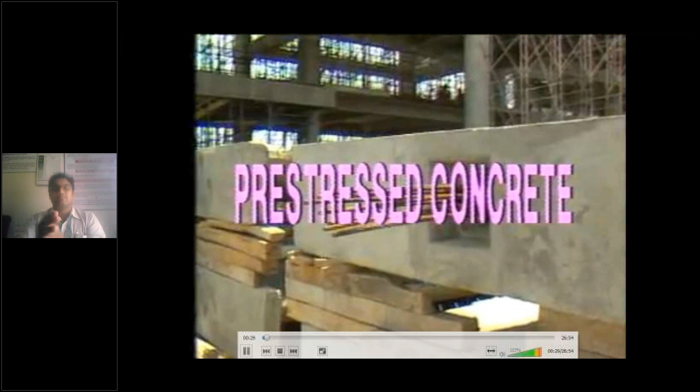Concrete is a very vital man-made construction material used for constructing structures like buildings, bridges, water tanks, etc. It is an intimate mixture of cement, sand, coarse aggregates, and water, suitably designed and proportioned. This plain concrete is very strong in compression, but very weak in tension.

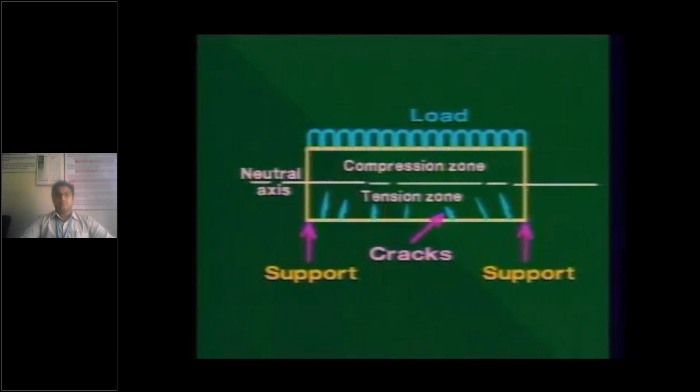Tension induces cracks, leading to structural or functional failure of concrete. So wherever tension comes, steel reinforcements are placed and embedded in concrete. By the bond action, this steel is firmly held by concrete so that tensile stresses are transferred to the steel reinforcement, and the compressive stresses are transferred to the concrete after application of the load.

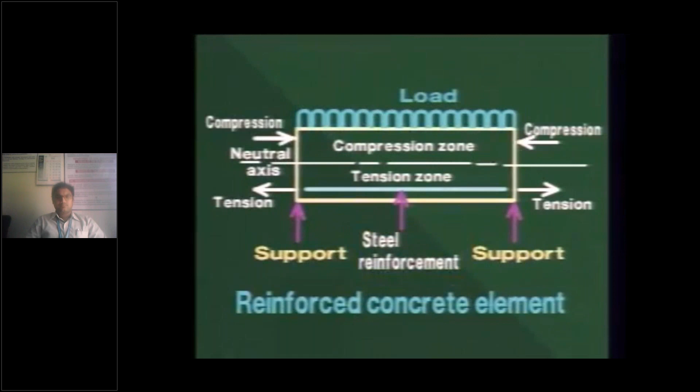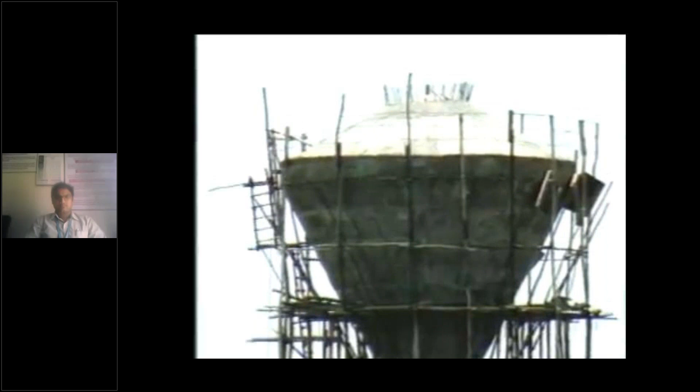This reinforced concrete is uneconomical and functionally ineffective when the span or height of the structural members is very high, when the applied load has more intensity and becomes dynamic, as in bridges, and in places where no cracks are to be developed, like water tanks for functional requirements. In such situations, reinforced concrete is replaced by prestressed concrete.

Let us now consider the example of a cycle spoke. The diameter of the spoke is very small compared to its length. When the axial compressive force is applied on that, it easily buckles. But when it is subjected to heavy loads as part of the cycle wheel, it doesn't buckle.

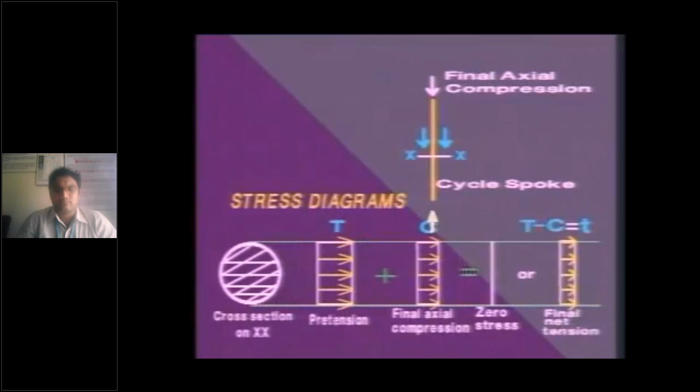This is because it is pre-tensioned. The already induced pre-tension neutralizes this compressive stress after loading, so that the net stress is either zero or tension. As no compression is ultimately developed, buckling is prevented and the wheel shape is maintained.

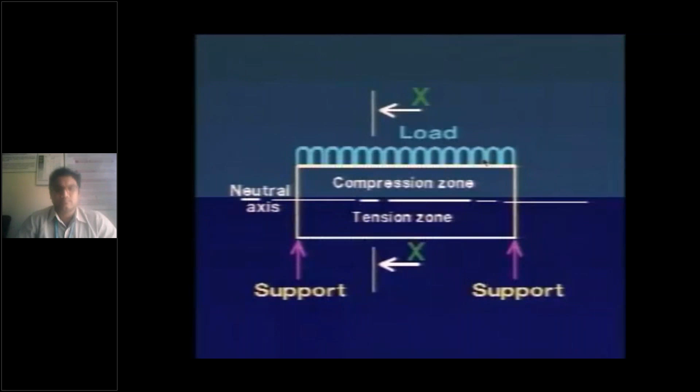This same concept is extended to concrete also. The pre-compression is induced in concrete. When the sections are subjected to tensile stresses due to loading, they are neutralized by the already induced pre-compressive stresses in concrete, so that ultimately the net stress is either zero or compression. Tensile stresses do not occur in concrete at any stage.

Hence, prestressed concrete is a crack-free material, and so it is homogeneous, whereas reinforced concrete is a cracked material, and so it is heterogeneous. In any prestressed work, the steel used is tensioned, which in turn induces the necessary pre-compression to the concrete before the external load is applied. Whereas in RCC, the steel and concrete take the tensile and compressive stresses respectively due to loading.

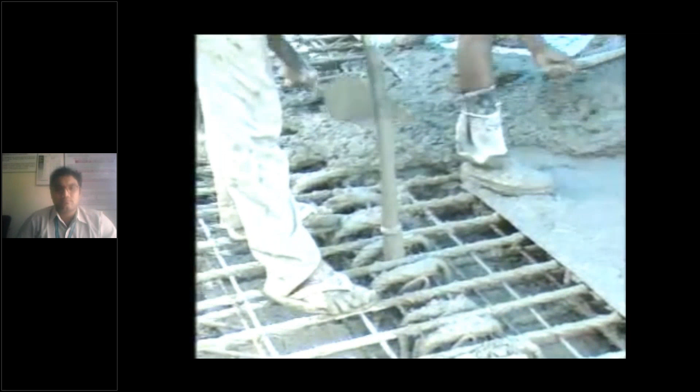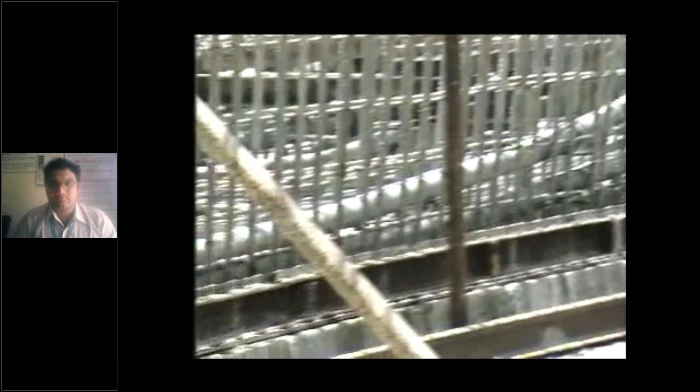This prestressing is classified into many categories. The two main categories are linear prestressing and circular prestressing. In linear prestressing, the steel in straight or parabolic profile is tensioned, which transmits pre-compression to concrete. This is done in linear members like girders, columns, slabs, sleepers, electric poles, etc.

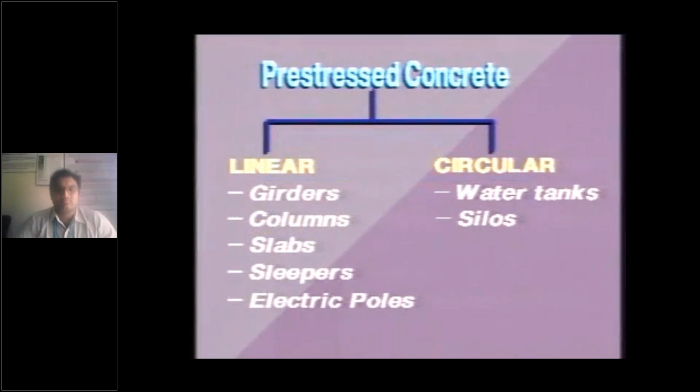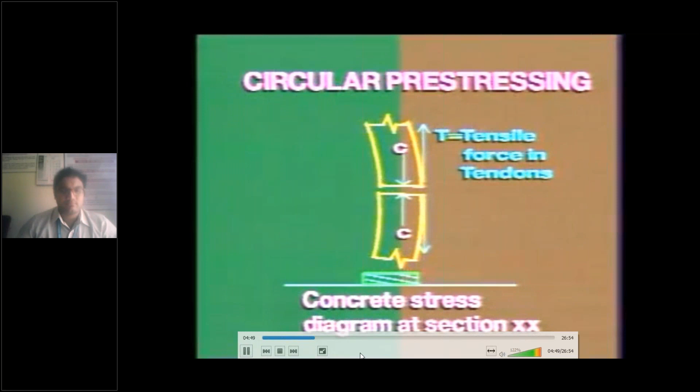In circular prestressing, the process is applied to circular structures like water tanks, silos, and pipes. Here, high tensile steel wires are wound under tension in circles around the structure. The tangential force in the wires creates an equal and opposite compressive stress in the concrete. This compressive stress in concrete is uniformly distributed over the cross-section.

Depending upon the extent of prestressing, the process is again classified into full and partial prestressing. Full prestressing conforms to no tension under working load, which is one end of the spectrum. RCC is at the other end of the spectrum, which is a cracked material. Partial prestressing finds a place in between these two.

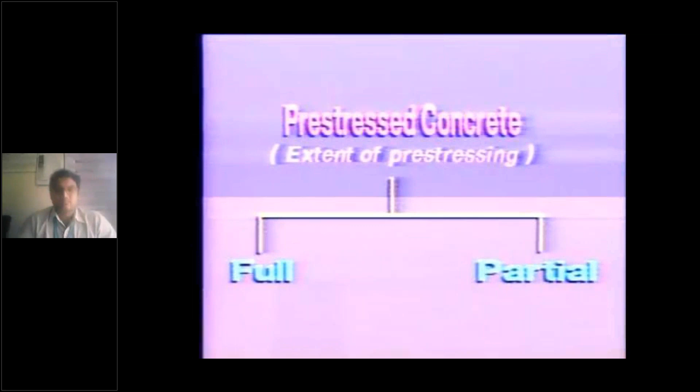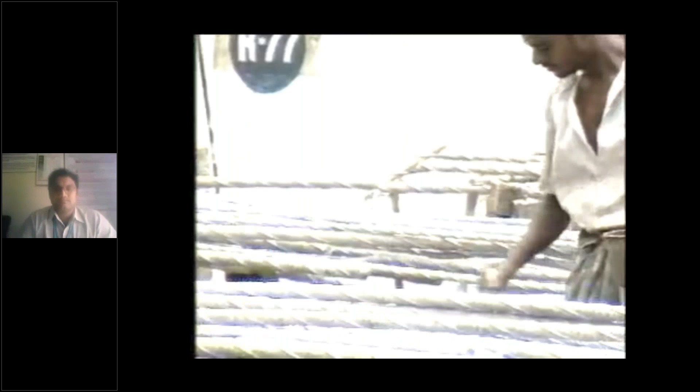Here, the tensile stresses are partially neutralized by prestressing. For the unbalanced tensile stresses, steel reinforcements have to be used. These steel reinforcements are given anti-corrosive treatment coating prior to their placement in position. This partial prestressing prevents an undesirable camber found in full prestressing in the initial stage.

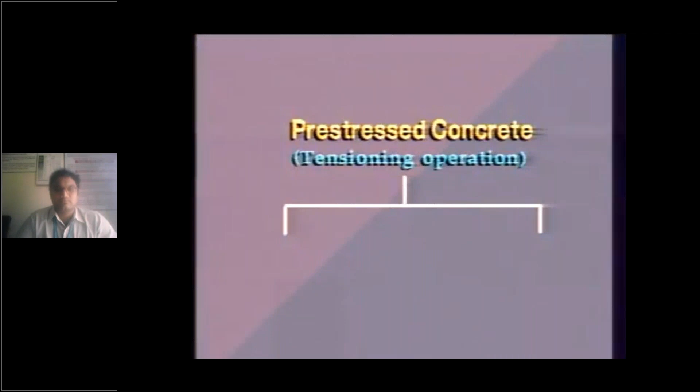Another classification of prestressed concrete, based on the tensioning operation, is pre-tensioning and post-tensioning. In pre-tensioning, the steel is tensioned before the concrete is placed. The anchorage and jacking abutments may be as much as 800 feet apart.

The steel is tensioned over the full length of the casting bed at one time. It is temporarily anchored against some abutments or stressing beds when tensioned. A number of individual members are cast along the stressed steel.

As the fresh concrete hardens, it bonds to the steel, and the concrete has reached the required strength. The jacking force is released. The steel tends to shorten, but is prevented from doing so due to the bond with the concrete. Hence, concrete is pre-compressed.

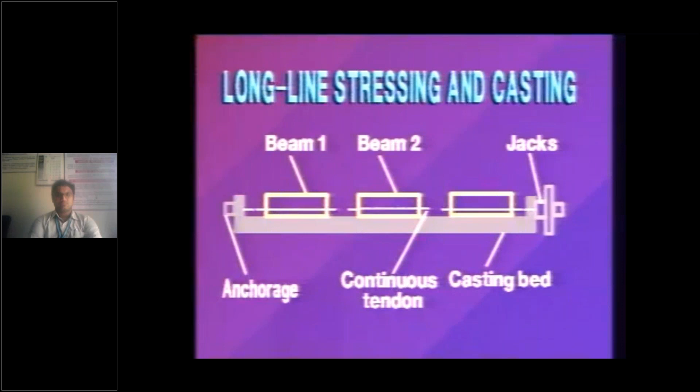Then the steel is cut free between the members. Great saving of labor is affected due to this condition. This long line method is used in precasting.

Guys, this is what we spoke about yesterday, the Hoyer method, right? So the Hoyer method is nothing but the long line method where you can cast multiple elements at a time with a single unit. So this long line method which was just shown in the video, you can try to relate these pictures with this particular video, okay.

Plants or laboratories where permanent beds are provided for such tensioning. It is also used in the field where abutments can be economically constructed. Here, only a straight profile for steel can be used for pre-tensioning.

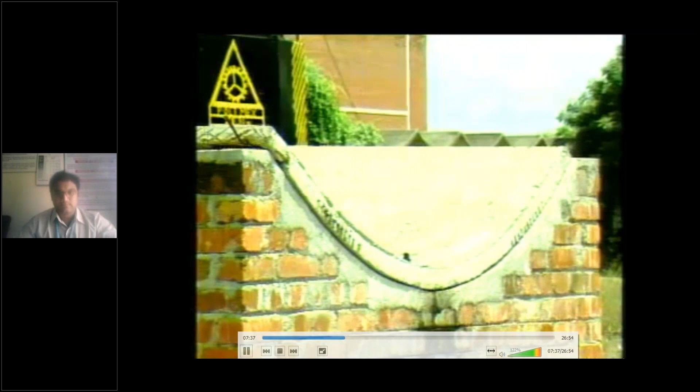Hyperboloid roofing shells, sleepers, etc. can be produced by this method.

Post-tensioning is a method of pre-stressing where the tensioning of steel is done after the concrete has hardened. This process can be applied to members either precast or cast in situ.

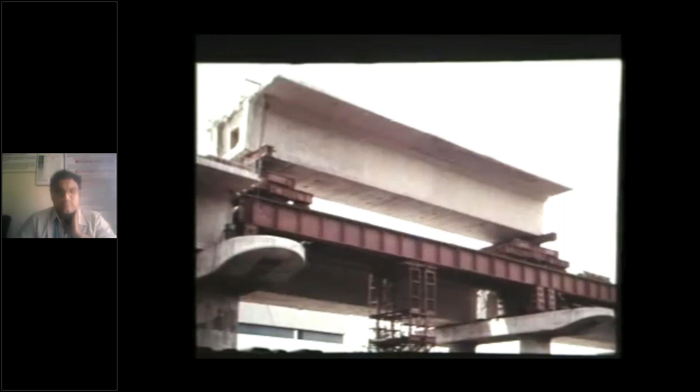Post-tensioning is normally used for massive constructions using big girders. For example, in the case of laying elevated railway tracks, post-tensioned box girders support the tracks and span between the trestle beams.

The trestle beams are supported between massive columns, which in turn are supported by pile foundations. The frames, with trestle beams and columns, bear the box girders.

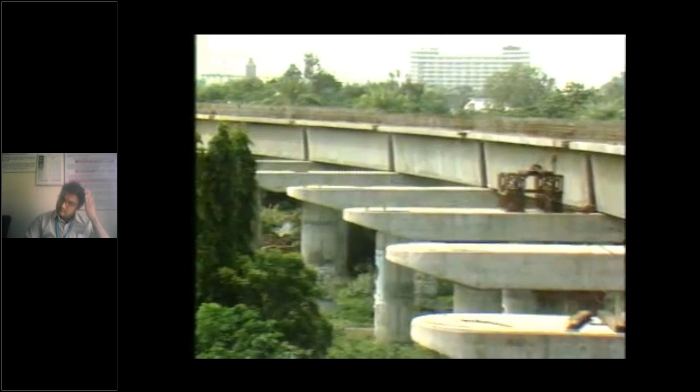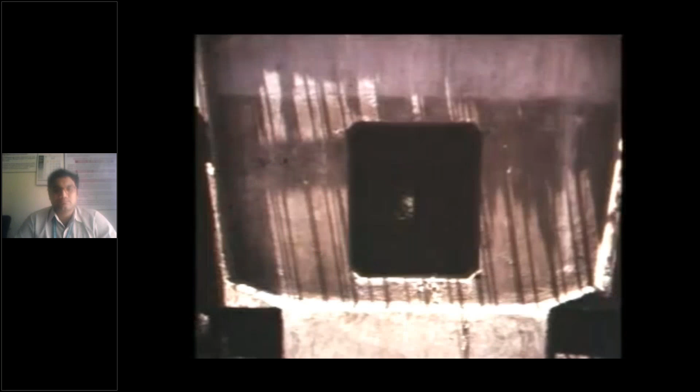Interiors of box girder bridges can be used to accommodate services such as gas pipes, water mains, etc. In larger spans, the bottom flange could be used as another deck to accommodate traffic.

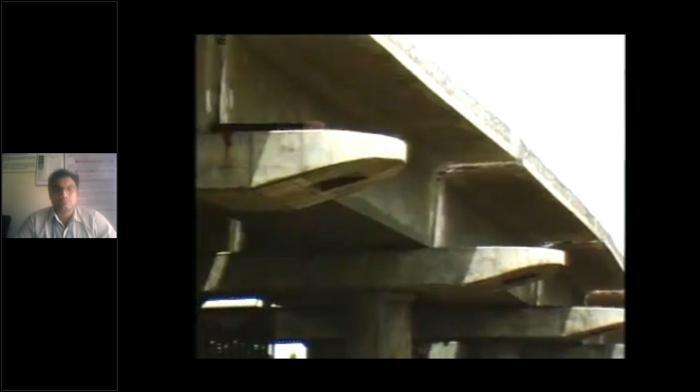The maintenance of box girders is easier as the interior space is directly accessible. So box girders are popular practical sections for bridges and elevated transporting systems.

In the case of massive constructions like a play stadium, the roof can be made from precast, post-tensioned hyperbolic paraboloid shell elements, which are ideal from a structural and architectural point of view.

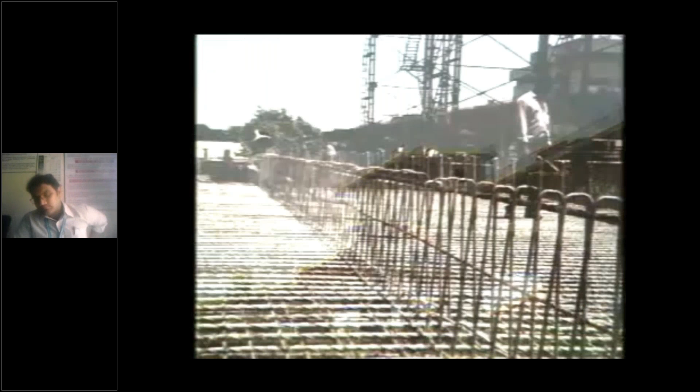In the box girders used for elevated transporting systems, as in railways, the top and bottom slab portions are designed as reinforced concrete slabs. Main reinforcements run parallel to the width, and secondary ones run parallel to the length.

A cantilever span is also provided on one side to accommodate the footpath. The webs are pre-stressed. Vertical shear reinforcements are provided in the webs to take shear force as in RCC.

Normally, the pre-stressing steel is used in the form of strands, where each strand consists of several wires or plies. Strands are made by laying a number of layers of plies in helices over a central core.

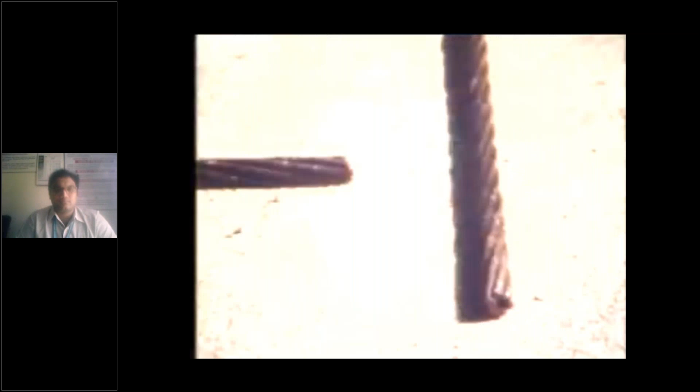A single straight wire forms the core. The remaining wires are laid in helices. The properties of the strand as a whole are to be considered in the design.

For example, in the BBRV system of pre-stressing, normally 7 plies or wires are there in one strand. Here, each ply is about 4 mm in diameter. 12 such strands are there in one cable.

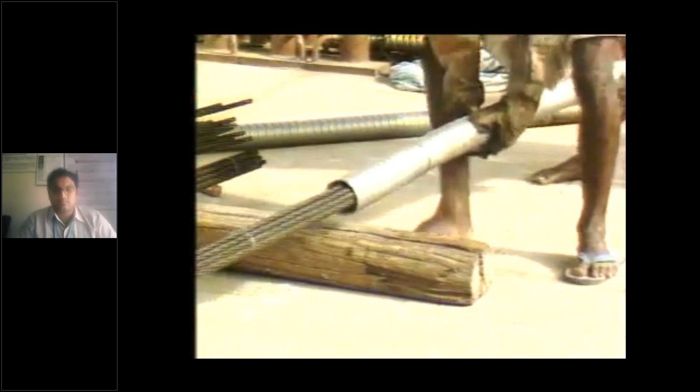These strands are obtained in coils. The required length is measured and cutting is done. The set of strands are inserted into galvanized iron tubes known as sheathing or ducts. Couplers are used for joining the various pieces of sheathing.

Then these cables are kept in position in the webs of the box girder in a parabolic profile. Various cables are kept at various ordinates. Normally the bottommost one is straight, and the top ones gradually curve upwards at the ends, based on design.

See, now you can see the profiling which was done in a parabolic shape, isn't it? Why was this profiling done in a parabolic shape? Can anyone tell me? Why can't it be straight? Why was the profiling in a parabolic shape?

See, when it is in a parabolic shape, when you try to stretch the strands, when you try to pull the strands after concreting and after the concrete sets and attains its characteristic compressive strength, then we do post-tensioning. When you try to pull the strands, they try to become straight, isn't it? So by that, it will try to push your concrete in the upward direction. So the steel wires will try to become straight, and in that moment, they will give upward forces to the concrete.

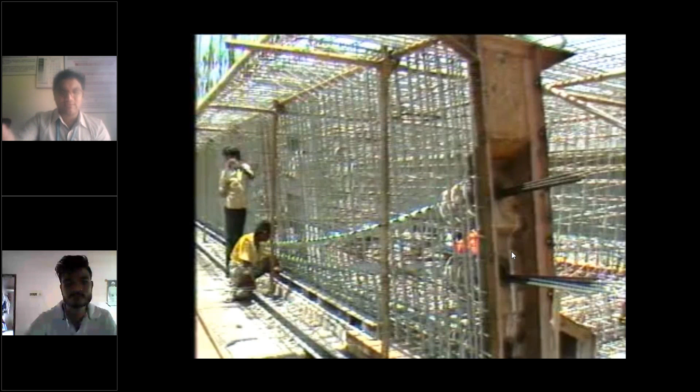So that is what's happening in the post-tensioning system. That's the reason why, in a proper design, the cables are profiled in parabolic shape. The staging of post-tensioning is also done in different stages. You can't stress all strands at a time. There are different stages you need to follow to do that post-tensioning, where the concrete will be subjected to precompression.

So that profiling, the design of profiling, everything we are going to study in the third unit. Continuing, consider a box girder in a parabolic profile.

Various cables are kept at various ordinates. Normally the bottommost one is straight, and the top ones gradually curve upwards at the ends, based on design. These cables are anchored at the ends. The strands pass through the conical end of the bearing plates, which also have a grouting hole. Then the strands pass through the holes of a circular plate outside. Wedges are driven to keep the tensioned strands in position to retain the applied stress. This is the arrangement at the end of the girder.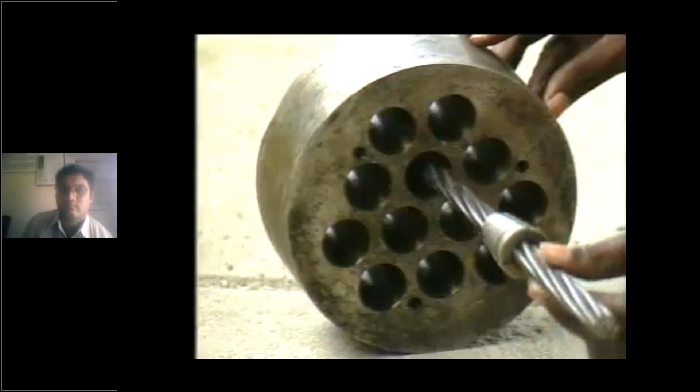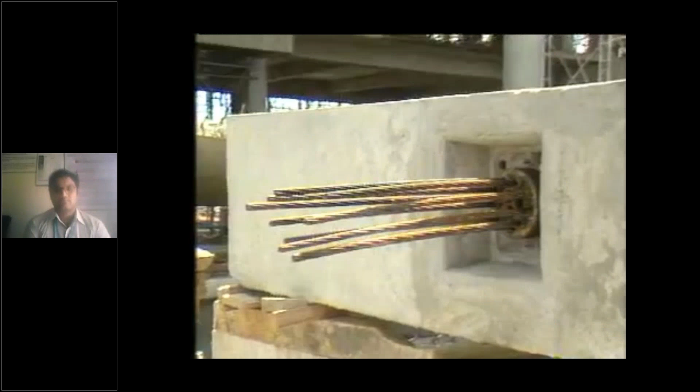This BBRV system is different from the CCL system in the stressing operation. In the CCL system, the cable consists of strands again, with each strand made of wires wound in a helical form. But instead of pulling all the strands in the same cable at the same time as in the BBRV system, here strands are pulled one after the other. The jacking and pump arrangement are designed accordingly. As mechanical anchorage like wedges are used in such systems for locking, they are called mechanical pre-stressing systems.

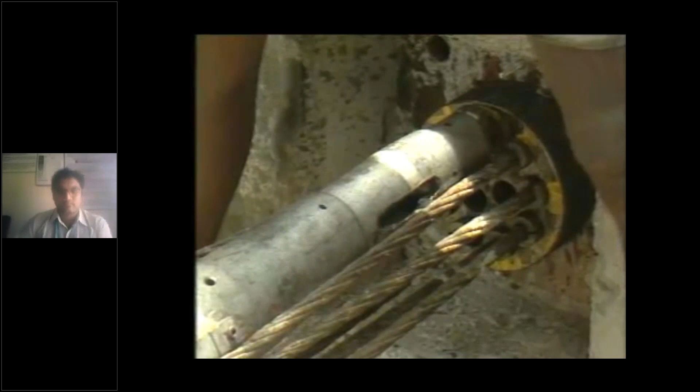In bridges, they use multi jacks, which pull all strands at a time. The single jack is used for slabs particularly, because there will be a single strand, so it can be pulled individually by each strand. In that way you need to understand where each type can be used, like single strand jack and multiple strand jack.

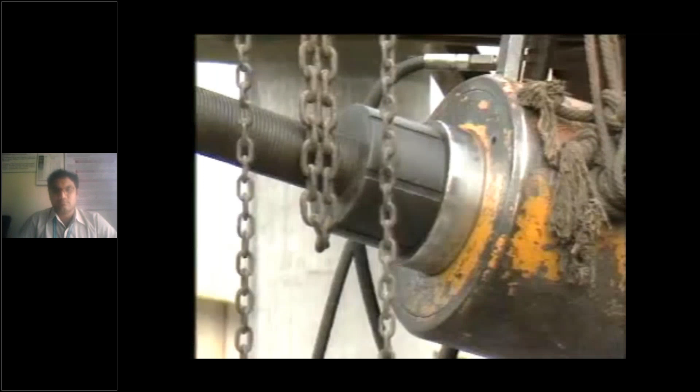Anchoring is done by mechanical means. Hydraulic jacks are normally used in mechanical systems, where the tensioning operation is done by a hydraulic or oil pump. The pressure is monitored by the dial gauge. As the tensile force is applied, the ram of the jack moves out. The outside projection of the ram, indicating the extension of the strand, is measured. Operation continues till the required extension is obtained. The conical wedges are driven to retain the stressing strands in position.

The stressing of cables is done in various stages. Extra or substitute cables are provided in the member. When a failure occurs in any of the tension cables, these substitute cables are used.

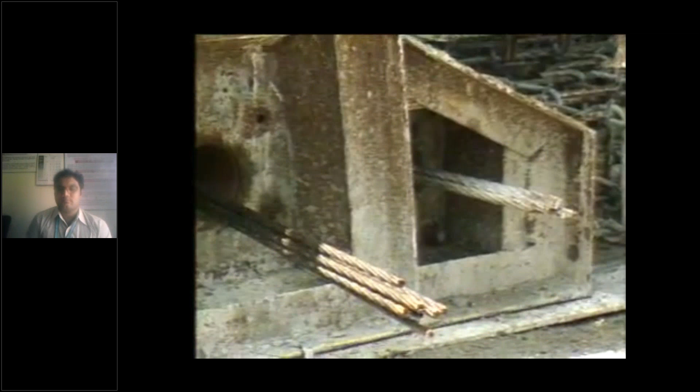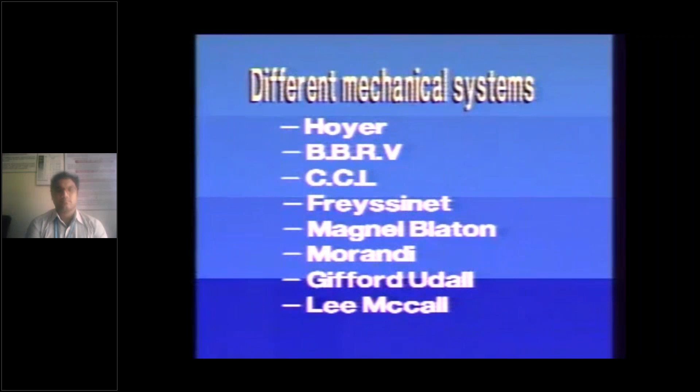Different mechanical systems are used in different countries. They are Hoyer, BBRV, CCL, Freyssinet, Magnel Blaton, Morandi, Gifford Udall, Lee McCall, etc. All these systems have two basic operations only: stressing the steel and anchoring it to concrete. The method of applying the pre-stress, the size and number of wires or strands used, and the mode of anchoring differ from system to system.

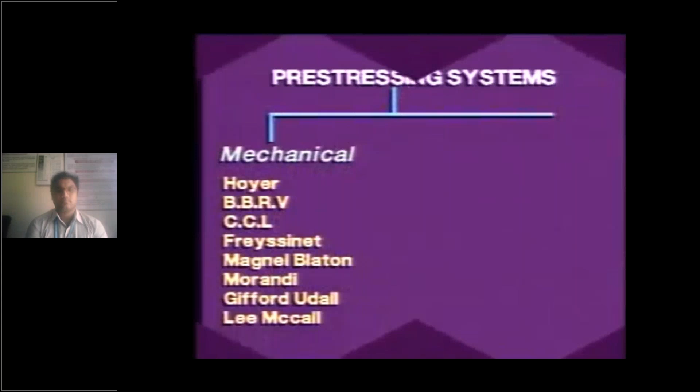Along with these normal mechanical pre-stressing systems, chemical and electro-thermal systems are also popular nowadays. In chemical pre-stressing, expanding cement is used. The ingredients of this cement are normal Portland cement, blast furnace slag, and ground clinker consisting of dicalcium silicates, aluminates, and calcium sulfates. Pre-stress is applied in several ways. The concrete member made of expanding cement expands during hardening. When the ends of the member are firmly held, the expansion is prevented and the concrete is pre-compressed.

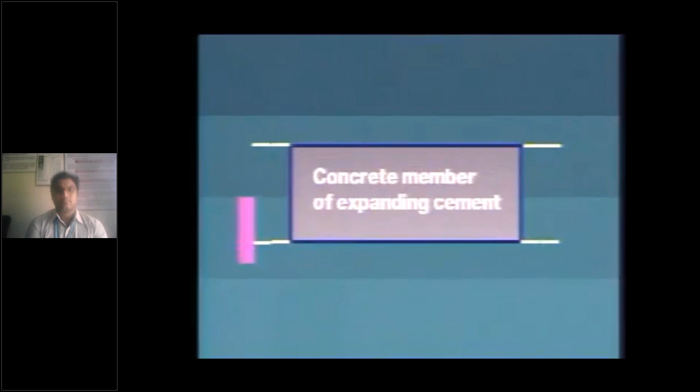In the second method, the member is constructed with normal cement. The gaps between the ends of the member and the rigid supports are filled by expanding cement at both ends. This cement, on expansion, applies compressive stresses to the member.

In the third method, the concrete member is made using expanding cement, in which the steel is embedded. When steel resists this expansion, compressive stresses are produced in concrete. Two-way slabs, pressure pipes, and hyperbolic paraboloid shells, etc., are pre-stressed by this process. This modern method of pre-stressing has not become very popular due to many practical difficulties.

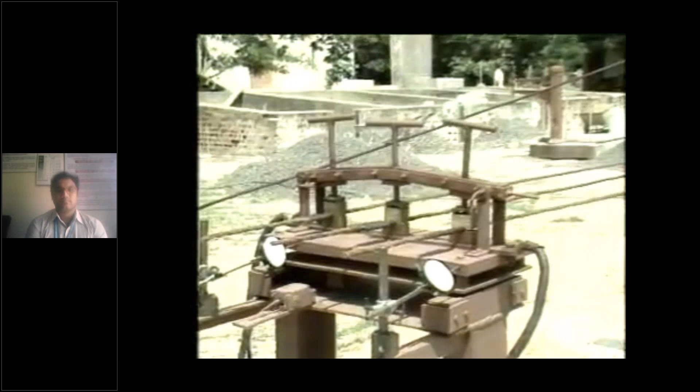In electrothermal pre-stressing, tendons are stretched by heating them with an electric current. This is done on a heating stand of 10 to 24 meters in length, which may accommodate 3 to 4 bars at a time. The heating stand consists of two end supports with brass contacts for clamping the two ends of the bars, and a few intermediate supports. One clamping contact holds the bar rigidly, while the other slides freely on rollers mounted on one of the end supports to permit elongation of the bar.

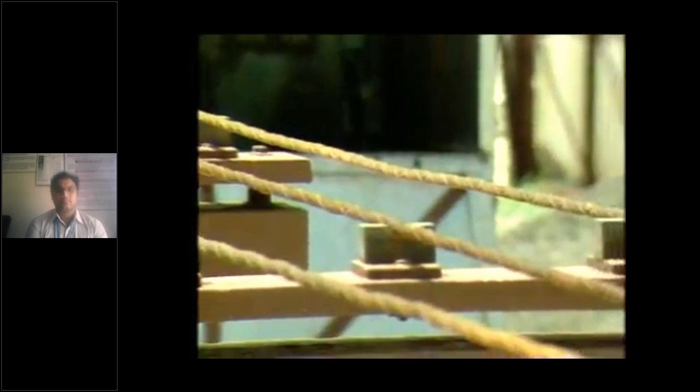The rods being heated are arranged side by side horizontally. The heating is done for a very short period to raise the temperature to 250 to 400 degrees Celsius. Such heating for a few minutes does not anneal the steel. The bars are lifted from the stand while hot and placed in the slots of end plates of a mold or a pre-stressing bed, and locked. When the bars cool, they pre-compress the concrete.

This method has several advantages. High yield strength deformed bars of Fe 500, Fe 800 may be used instead of high strength pre-stressing steel. Expensive grips and anchoring devices are avoided. Use of deformed bars reduces the transmission length, which is critical in short pretensioned members like railway sleepers.

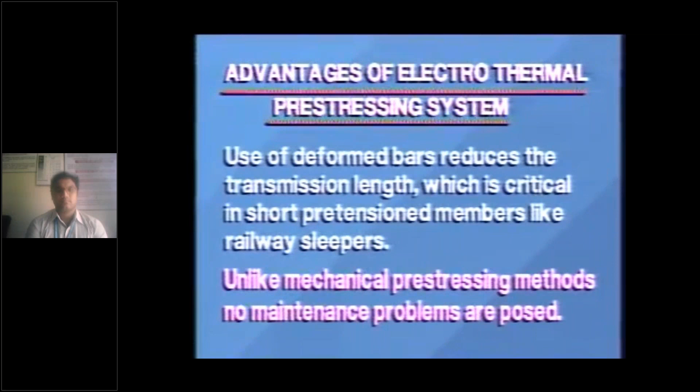Unlike mechanical pre-stressing methods, no maintenance problems are posed. Less labor force is required, and generally the capital investment on the plant is very much less. Flooring and roofing elements, precast trusses, and poles are manufactured using this method.

Whatever pre-stressing system is used, three stages are to be passed through by these pre-stressed elements: the initial stage of tensioning, the transfer stage where concrete is pre-compressed, and the final stage of load application.

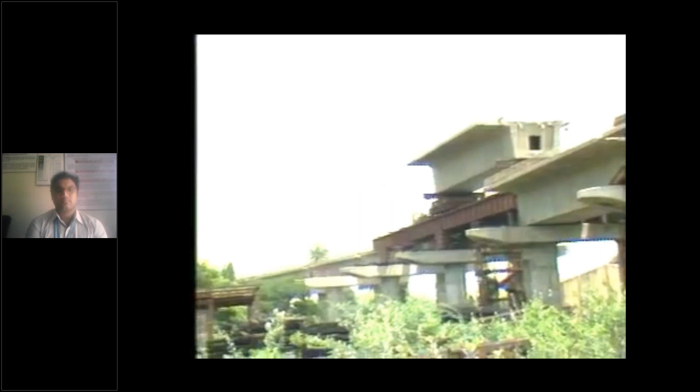As there is a time lag between the transfer stage and the final stage, the available pre-stress is reduced in magnitude. This loss in pre-stress is an important criterion in pre-stressed concrete.

These losses are due to slip and anchorage, elastic shortening, relaxation of steel, creep in concrete, shrinkage of concrete, and friction and wobbling effect.

These losses are taken into account precisely in the design, because overestimation of the losses leads to undesirable camber, and underestimation of losses leads to cracking.

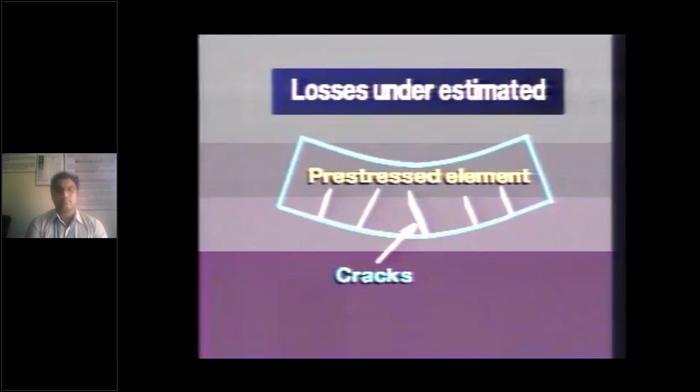As these losses are taken into account, the cables are stressed high. So high-strength steel is used for pre-stressing purposes in mechanical systems. To economize the process, commercial anchorages for pre-stressing steel are designed on the basis of high-strength concrete.

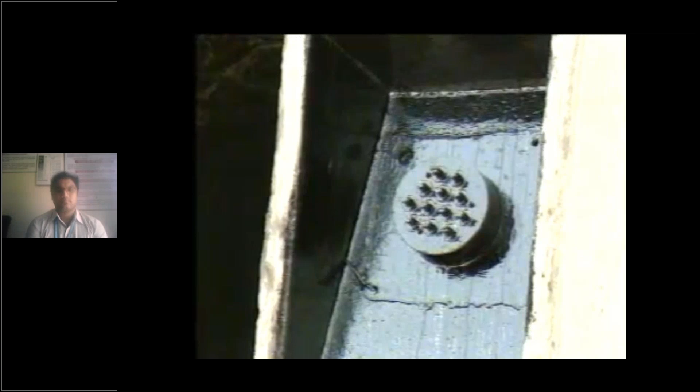Weaker concrete may fail under the application of pre-stress. Such failures may take place in bearing, or in bond between the steel and concrete, or in tension near the anchorages.

In order to bear higher stresses in all stages, high-strength concrete is used for pre-stressing purposes, unlike reinforced concrete. Under normal circumstances, the loss in pre-tensioning units is around 20%, and in post-tensioning units it is around 15%. Hence, a minimum of M40 grade is recommended for pre-tension work and M35 for post-tension work.

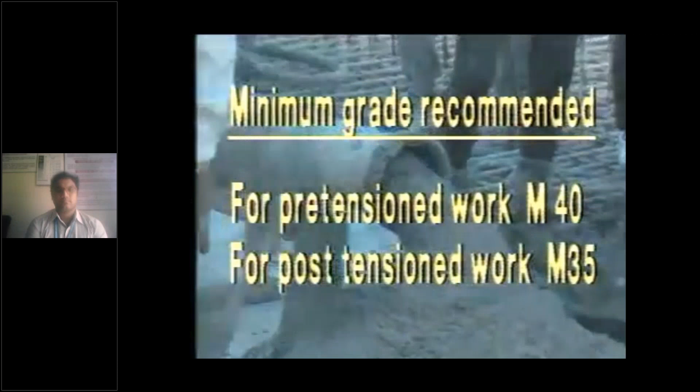In pre-tension construction, the pre-stress is normally transferred to the concrete by bond over a length which may be equal to the member depth. No problem arises due to the gradual stress input.

On the contrary, for post-tension elements, the pre-stressing force is transferred through the bearing of the end anchorages and applied in full at the extreme end of the element. Hence, the end zone of the elements, called end blocks, have complex stress concentrations.

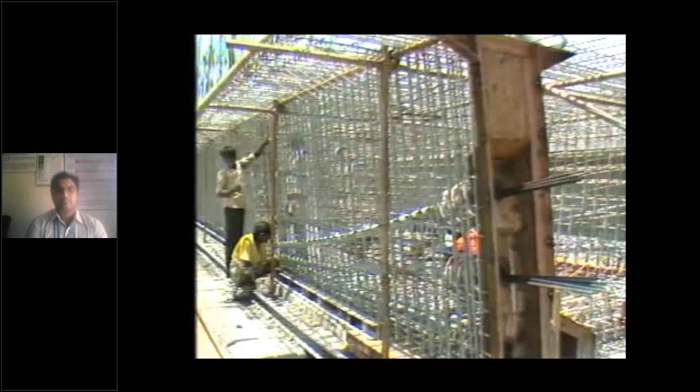Pre-stress in the concrete changes from concentrations at the anchorages to the calculated stress distribution, so it is subject to high stresses. The end block is subjected to high compressive and shear stresses with transverse tension.

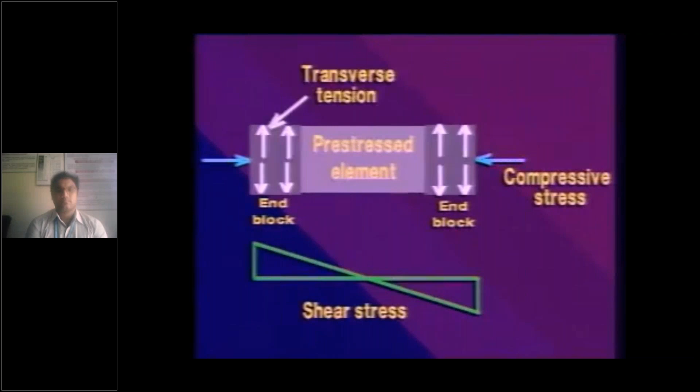Adequate shear and spiral reinforcements are to be provided at the end block as per design. Even in the case of flanged beams, end blocks are made solid and usually rectangular, to provide the necessary bearing area and to prevent excessive stress concentration.

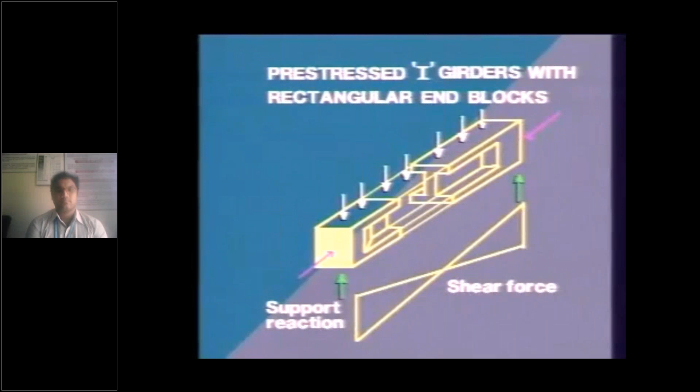In box girder sections, the thickness of webs at the end block region is more and gradually reduces to the desired value. This is a vital concept in post-tensioning systems.

In post-tension systems, end blocks, meaning end supports, are supposed to be more stressed. That is the reason why in post-tensioning elements like box girders, the end diaphragm or end dimension will be more in thickness compared to the thickness of the same element at the center.

If you take an I section, the thickness is more at the support and it will converge towards the center. That is the reason you can see the convergence of higher thickness to lower thickness in the girder, even in the box girder.

Please follow my cursor. This is the converging part from more thickness to less thickness. This is the less thickness of the girder, this is the more thickness, so this convergence takes place. This is how the tapering happens, reducing the girder's thickness towards the center, so you can see it clearly.

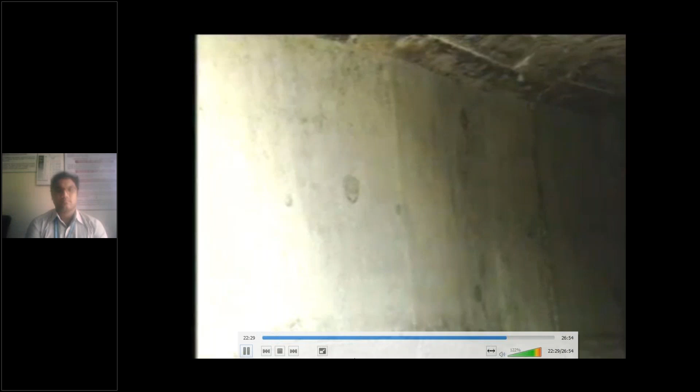Post-tensioning is preferred in many cases because the losses are less compared to pre-tensioning. Parabolic cables are possible in post-tensioning.

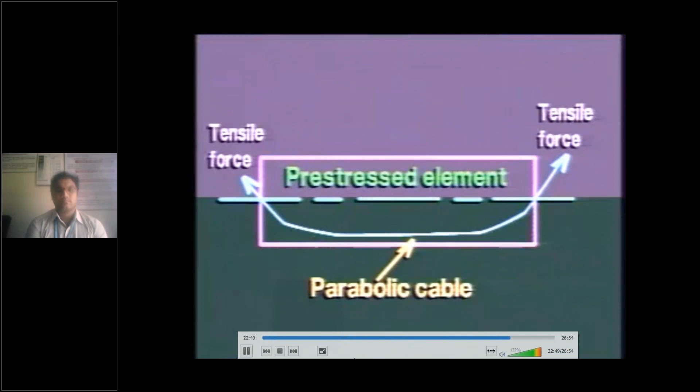The tensile pre-stress in the parabolic cable is tangential to the cable. Due to this condition, horizontal and vertical components are produced. The horizontal components get neutralized, and the vertical components neutralize the vertical downward forces to some extent. Hence, the shear effect is reduced.

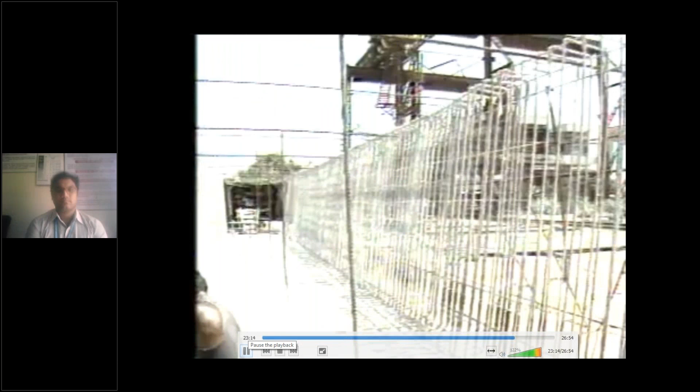For the unbalanced shear, reinforcements are provided. These upward forces due to pre-stress are more than the downward self-weight of the element in the initial stage. The deflection due to the applied downward force at the final stage counteracts this initial deflection, hence the final deflection is considerably reduced.

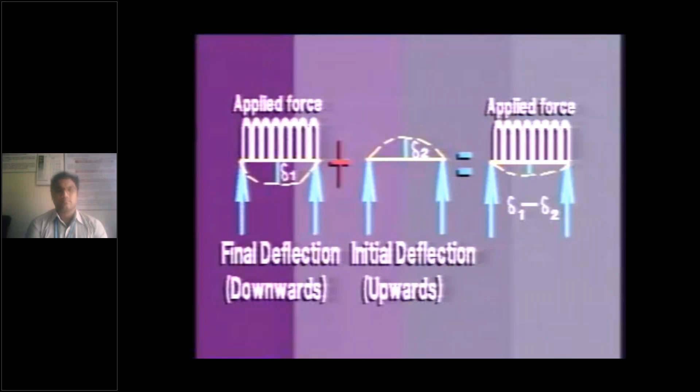Thus, the structural and functional requirements are catered to. Have you understood this concept? This is very important. This is why the pre-stressing technology came into existence, just to reduce the deflection of the beam so it can avoid cracks in the beam.

This is the final deflection, which is toward the downward direction, and this is the initial deflection, which is upward. Balancing the two together, you can see very little deflection in your pre-stressed element. This is achieved by compressing your concrete element in the upward direction, which reduces the deflection of the parent element.

Considerably reduced. Thus, the structural and functional requirements are catered to by these parabolic cable profiles.

As stated earlier, the high-strength concrete is produced by a special batching plant. The ingredients are mixed thoroughly as per the designed proportions and loaded from the batch mixer to the transit mixer, which carries the concrete to the required place, keeping the mix agitated.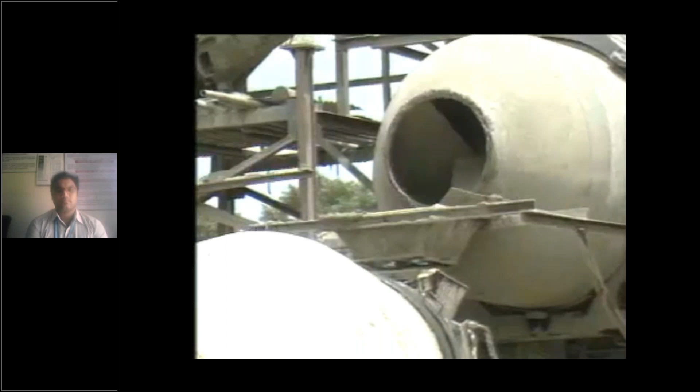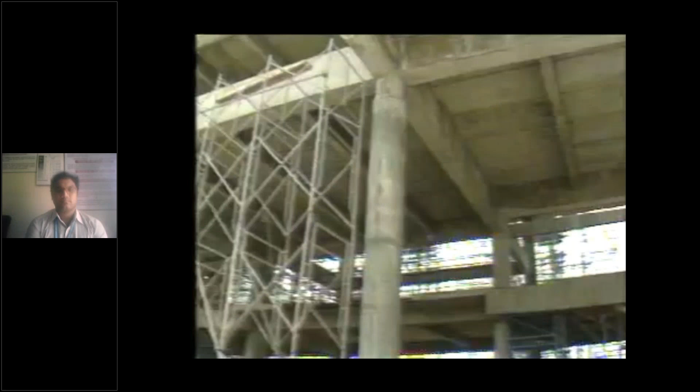The concrete is then pumped by pressure through pipes and pouring is done. The compaction is done by shutter vibrators and poker vibrators effectively. In massive constructions, steam curing is done. Steam is generated from the boiler and passed through curing pipes.

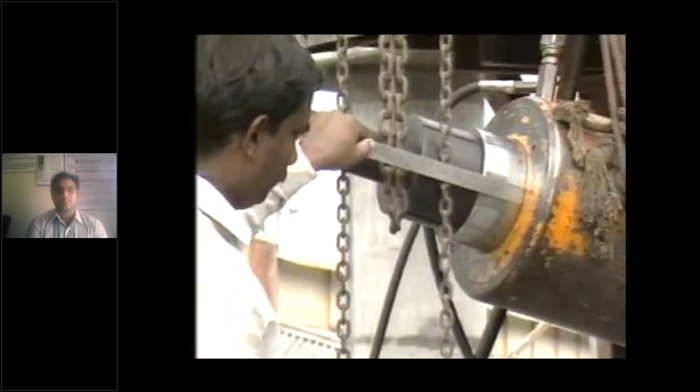After concreting is over, the post-tensioning is done using a suitable system. In order to provide permanent protection to the post-tension steel and to develop bond between the pre-stressing steel and the surrounding concrete, cement grout, with or without admixtures, is pumped into the sheathing through grout holes using grout pumps.

If it is an elevated construction, like railway bridges or laying elevated railway tracks as in metropolitan city transport systems, heavy box girders are cast on the ground level, which are precast, pre-stressed units.

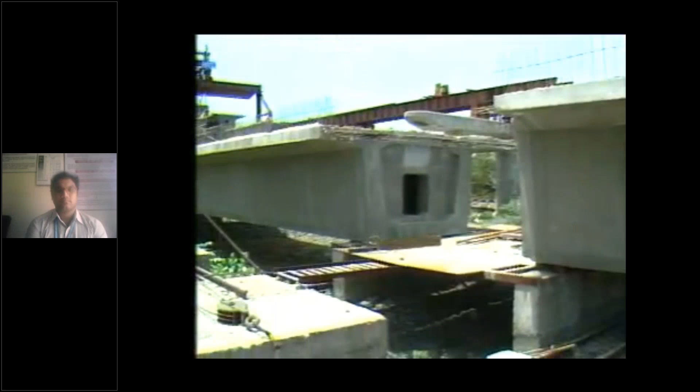Casting them on the ground in the yards can be done effectively by easy and convenient operations, and the quality control is good. These precast, pre-stressed girders are lifted to the required height by heavy jack arrangements. They are then carried on trolleys to the required position and lowered by means of jacks.

Neoprene pads are provided below these girders to impart flexible movements at the supports. If it is a massive structural work like a stadium, it could be carried to the required position by cranes.

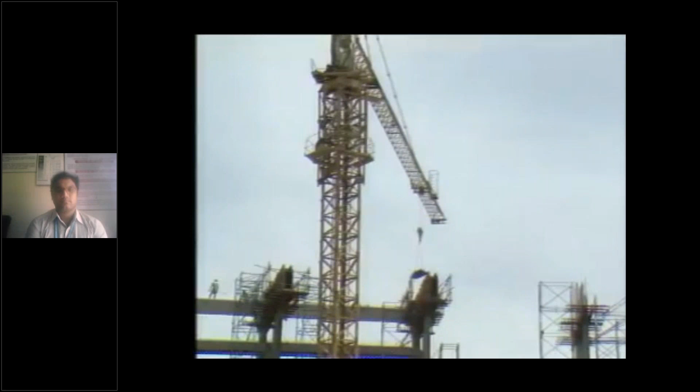Because of the use of high-strength concrete and steel, and as the elements are stressed even prior to loading, stringent quality control measures are to be observed. Hence, quality control labs are established at the site itself, and the quality is tested and controlled continuously in order to ensure effective, stronger, and economical construction using pre-stressed concrete.

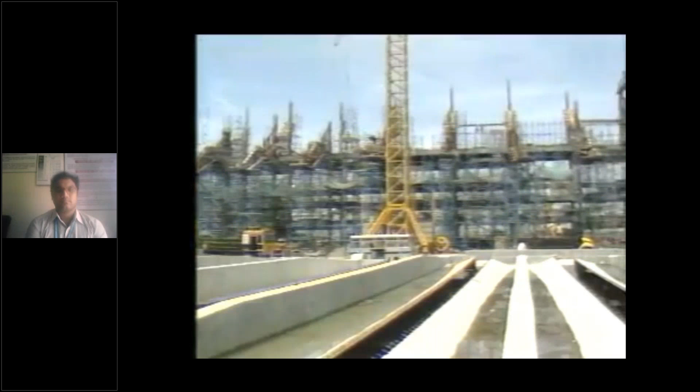Yep. So guys, now tell me, how was the video? How was the video?

When I upload this video on YouTube, I think you'll get a clear picture. I think this video gave you a complete idea on what exactly pre-stressing is, and the different types of pre-stressing systems. You should also have a lot of exposure towards pre-stressed concrete by having industrial visits, so that you can understand it better. That's the reason why I showed this in the form of a video.

Now let's come back to our presentation. In lecture 8, we are going to discuss different methods of pre-tensioning and post-tensioning. Yesterday we already went through the Hoyer method, which is useful for the pre-tensioning system. So now we'll go through the methods and systems of prestressing. Pre-tensioning we already discussed in the previous class, and now coming to the other 4 methods useful for the post-tensioning system: the Magnel method, Freyssinet system, Gifford Udall system, and the Lee-McCall system.

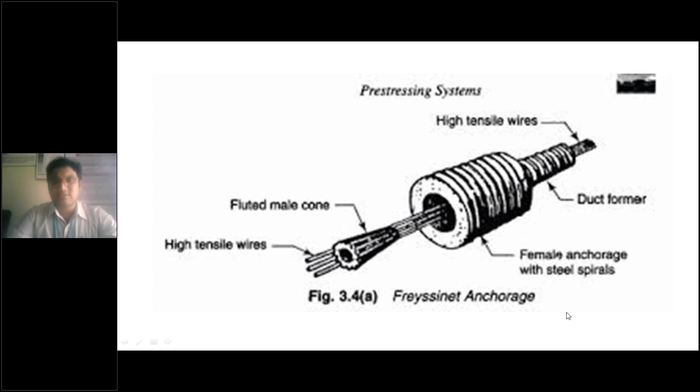This anchorage device consists of a concrete cylinder, spiraled with steel wire, with a concentric conical hole, corrugated on its surface. A Freyssinet double-acting jack is used on either side of the element, girder, or beam to apply tensile forces to the strands, inducing compression forces into the concrete. That is how this first method, introduced by Freyssinet, applies post-tensioning to the strands, inducing pre-stressing into the concrete.

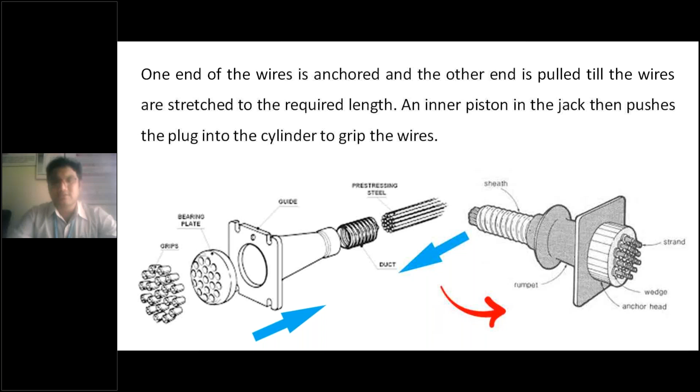Coming to the next system, the Magnel Blaton system. We go in order so you can observe the advantages of each system, starting with the Freyssinet system. The Magnel Blaton system is more advanced than the Freyssinet system. In the Freyssinet system, several wires are stretched at a time - you can see a bunch of strands stressed together. But in the Magnel Blaton system, only 2 wires are stretched at a time. The whole bunch of strands is not stretched together; 2 individual wires are stretched at a time.

This method was introduced by a famous engineer called Magnel, from Belgium. Instead of stretching all strands at a time, individual strands are stretched one by one. This is what the Magnel Blaton system introduced, where it can stretch the wires within the designed force, with 2 or 3 strands stretched individually.

In this system, the anchorage device consists of a sandwich plate with upper and bottom jaw, which hold the strand with the help of wedges. The sandwich plate has grooves to hold the wire, and the wedges are also grooved. Each plate carries 8 wires, and it can stretch 2 wires individually. That is the Magnel Blaton system.

In between the two ends, the spacing of the wires is maintained by spacers, since the wires should not touch each other. Spacers are used to maintain spacing of around 5 mm or 7 mm between each individual wire.

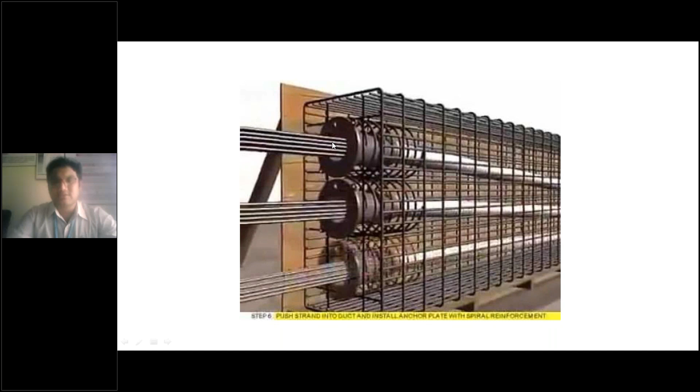This is how the tube anchorage works - there is a spiral casing, an anchorage cone, a bearing plate, wedges, and the strands. So in the tubular anchorage system there will be a bearing plate, anchorage wedges, and anchor grips.

The anchor plate may be square or circular, depending on how many wires you are going to provide. If there is a bunch of wires, you go with a circular system. If there are only a few, you go with a square system, having around 8 or 12 tapering holes within the particular casing.

Here you can see how the tube anchorage was placed within the anchorage cone. There is a thrust plate, which we call the bearing plate, and a thrust plate, and there is an anchorage plate, and an anchorage grip which uses wedges.

In all systems the setup of materials and stressing materials is essentially the same. The only difference is how you are doing the stressing - single strand stressing, double strand stressing, or multiple strand stressing. That is how the systems vary, such as Freyssinet, Gifford Udall, and Magnel Blaton systems - based on the type or system of stressing.

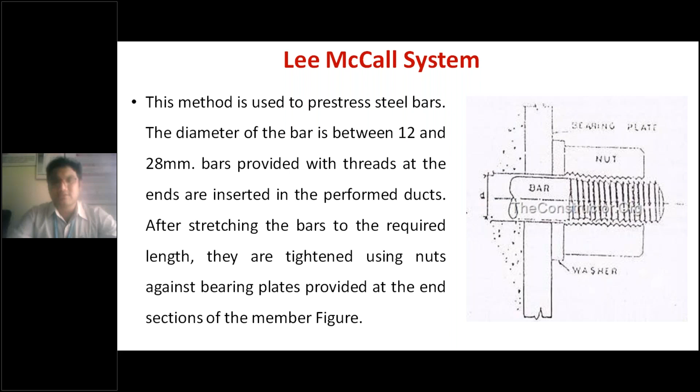Once the rod is stressed, you can cut it into a required length and use that rod in terms of bolts. With the help of a washer, there will be a bearing plate, and you can see where the nut was threaded. Everything can be made use of in the form of a bolt. That is what the McCall system is, and the other methods we already saw in the video.

What are the other parts of stressing systems apart from mechanical stressing system? There are two stressing systems: one is electrical stressing system, the other one is chemical stressing system.

Let's talk about what electrical stressing system means. I think you have already seen how the electrical stressing system is made, where the rods are subjected to high temperature so that they can stress, then they are cooled down so that it squeezes the concrete to its required design. In electrical pre-stressing, reinforced bars are coated with thermoplastic material, and such material like sulfur or low melting alloys are buried in the concrete. After concrete is set, electrical current of low voltage with high amperes is passed through the rod.

I think in the video you've seen how electrical pre-stressing is done in terms of pre-tensioning and post-tensioning. In pre-tensioning, you supply electrical current of low voltage to the rod, where it is subjected to temperature inside. Then the concrete is poured, and when it cools down, the concrete is subjected to squeeze.

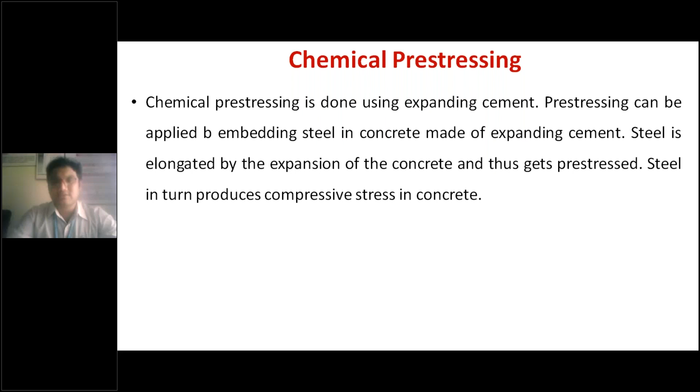Pre-stressing can be applied by embedding steel in concrete made of expanding cement, where the steel is elongated by expansion of the concrete, and thus it is pre-stressed. The steel in turn produces compression stresses in the concrete, as we all know. That is how chemical pre-stressing is used, where you can compress the concrete with the help of expanding cement.

So let's see the examples. Here, chemical pre-stressing is also called self-stressing or chemical stressing of concrete. So what kind of chemicals are used to make concrete chemically stressed?

It was made possible by the development of expanding cements by Lossier of France. Lossier is the scientist who first introduced chemical pre-stressing into technology in 1944. They generally use expanding cement consisting of 75% Portland cement, 15% alumina cement, and 10% gypsum, which results in the formation of calcium sulfoaluminate. This combination makes the cement expand.

With that expansion, the concrete gets squeezed between the expanding cement supports. You can see the examples. This chemical pre-stressing is generally suited for elements like precast beams and columns. Nowadays a lot of precast elements are being manufactured, so they use this kind of chemical pre-stressing.

Why? Because it doesn't require any mechanical setup. You don't require any jack, bearings, wedges, or strands, nothing. You just require expanding cement to go with chemical pre-stressing. That's why a lot of precast beams and columns are post-tensioned with the help of this chemical pre-stressing technology.

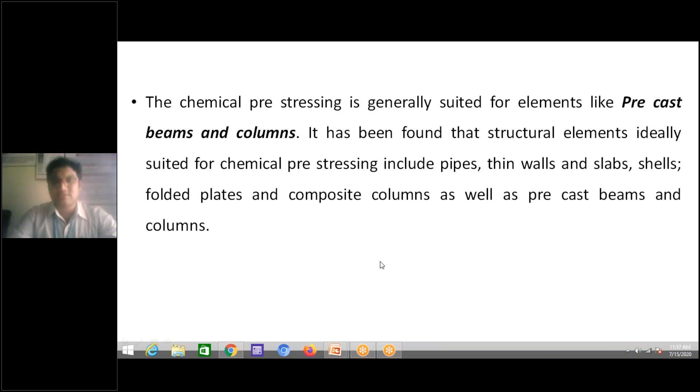I hope that video gave you a complete picture in understanding different types of stressing systems. There won't be much difference in all the systems. The only difference is how you are stressing it—whether stressing a single wire, two wires at a time, or a whole bunch at a time. That's what varies between different systems. End of the day, everything is stressed with certain design loads.